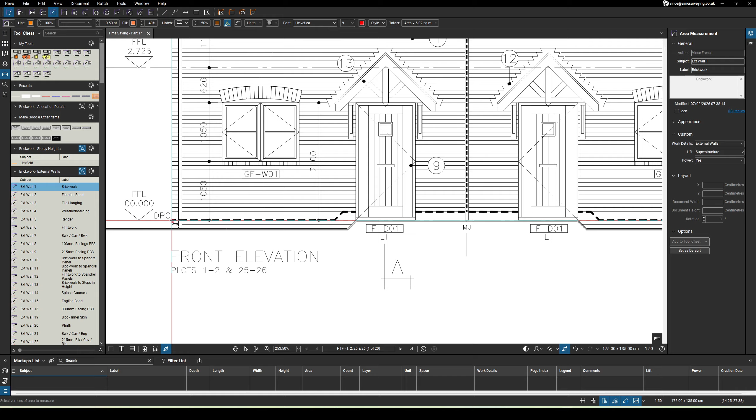I've got loads of them, and a typical way of normally doing this is I would come over here, I would grab my first wall measurement, and I would then mark up. I would try and work out this bit over here, and then I would get it to where I want it for the first floor. So that's 2.6. I don't want it, if I come over and look at the sections,

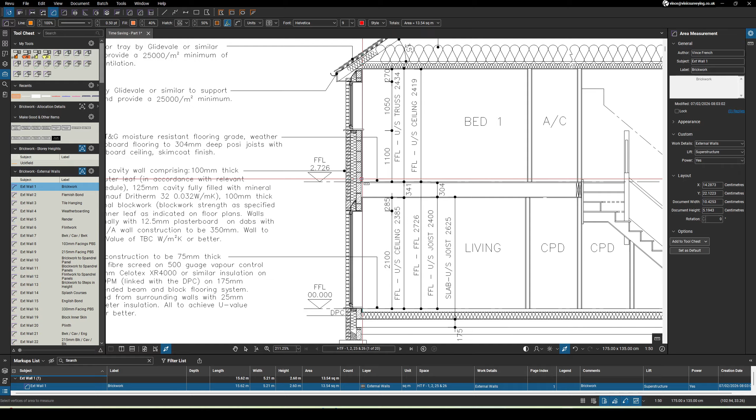I actually want it 2.4 to underside of joist, and then to get up to underside of plate I want another 2.7. You're probably saying, well, I'm allowing for 2 courses of facework here that I don't need, but the kind of allowance of that will be offset by any coursing blocks that we have to do in the internal skin. So I would just measure it up to 5.1 meters. So that's slightly wrong. So I'm going to bring this down a bit.

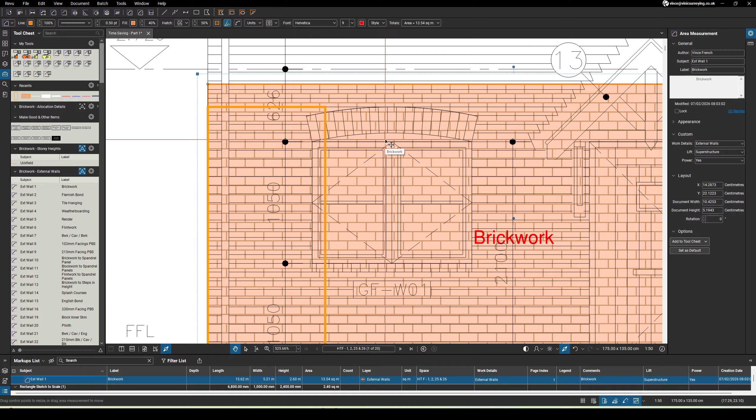So I could look at sketch to scale. Let's have a look at sketch to scale. So I could do a meter wide, and I want it 2.4 high. So if I put this over where I am, so I'm going to start again. I'm going to delete that area out. I'm going to grab this tool again. I'm going to come over to the middle over here. Here we go. So I'm now 2.4 high.

I could do the same for measuring the first floor. So for the moment, yeah, let's do that again. So if I do a meter wide by 2.7 high, gives me where I am here. Just drop this down here, and then I'll grab this over here again. So that kind of gets me to where I want to be for my outside walls.

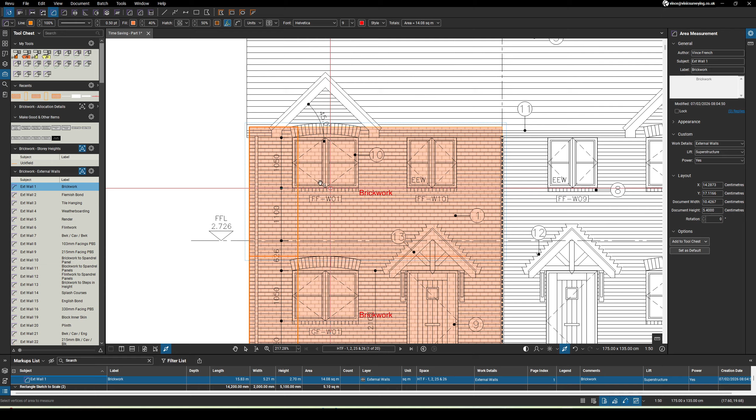It's a bit of a fiddly process, but then I'd need to also look at things like I start adding things on for DPC trays here. I might have a DPC tray at first floor joist level as well. Then I'd want to start looking at scaffolding. So I'd have a blocking lift down here, and then I'd have a scaffold lift here somewhere, one just under joist, third lift, and one just under plate. So I've measured all of that.

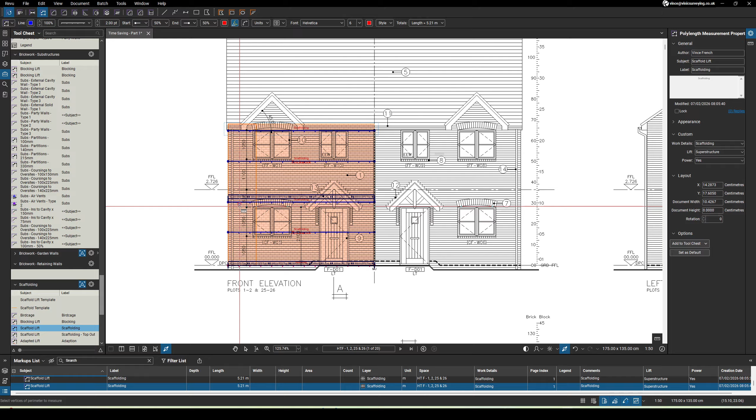Obviously I do cutouts for the windows and everything else, but I'm just using this example for the external walls and the main bits of work. So I've done that. If I wanted to, for the rear elevation, I could literally just copy all of that and drag it down and put it in place. So that's quite quick to do that measurement there. But then I need to come over here and start measuring all of this. And I was thinking there must be a different way of doing this and a different process.

And I don't know how many people looked at using the properties panel, but I thought to myself, well, we can use that. So what I've come up with, instead of doing all these separate elements, oh, by the way, what I would also do in all of these is over here I would allocate that to the ground floor and this one to the first floor, and I'd have to do all of this as well. So I thought, instead of doing all of that, why don't I do this instead?

So what I'm going to do is we can use the properties panel. So I'm going to go back up here and external wall one. So I'm just using this as an exercise.

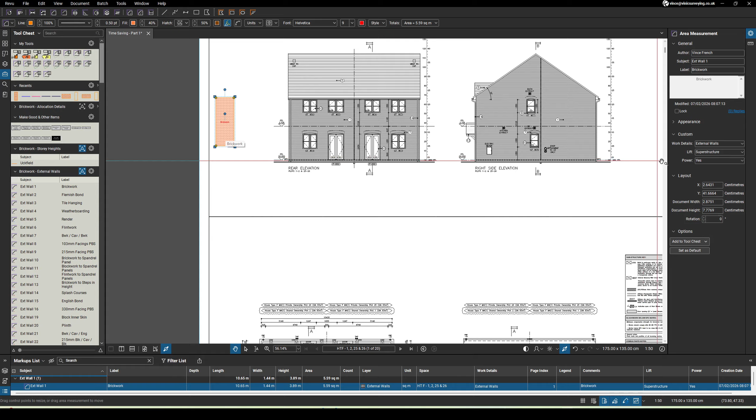I'll do this slightly differently if I was measuring elsewhere. So on a proper project I'd put it on a header page or front page. But what I'm going to do here is you can start using this. Now this is a 1 to 50. So all I need to remember is the document, the measurements in here are double.

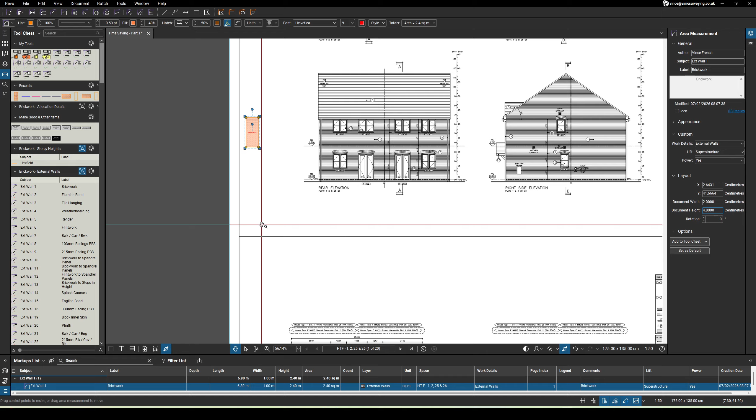So if I put document width of say 2 in here and 4.8 here, you'll see down here I'm actually 1 metre wide but 2.4 metres high. I'm going to take that, I'm going to duplicate it, I'm going to make this one 5.4, which is my 2.7 twice, so it's 2.7 high down here. That's great, I'm going to do that.

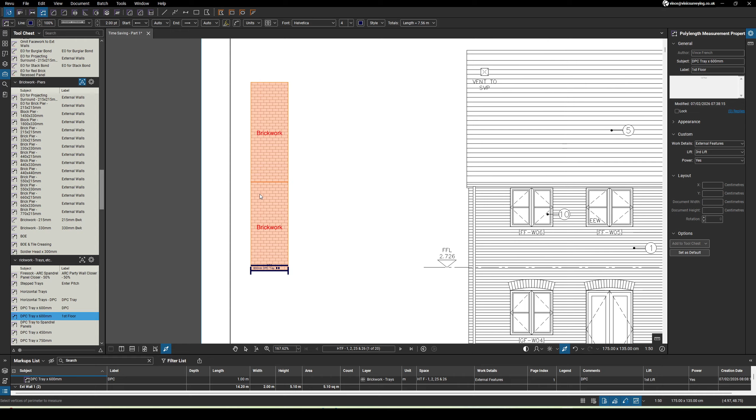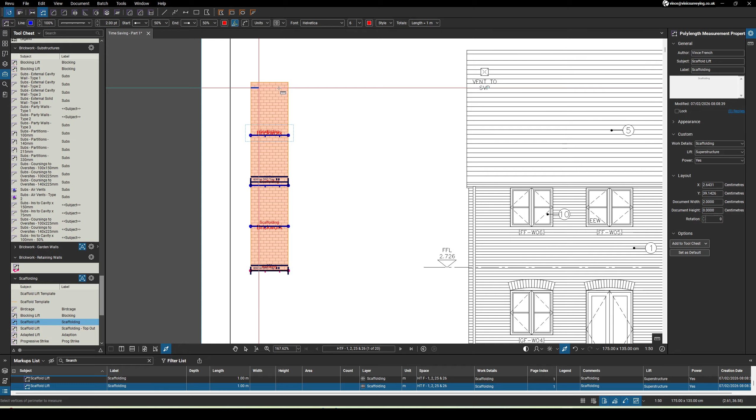I'm going to start adding information like that's the ground floor, this is the first floor. I'm also going to come down here and I'm going to put my trays on, DPC, first floor, and I'm going to add my scaffolding on. So, blocking lift, scaffolding, another lift, and another, and another. Right, so I've got a little template there, which is great.

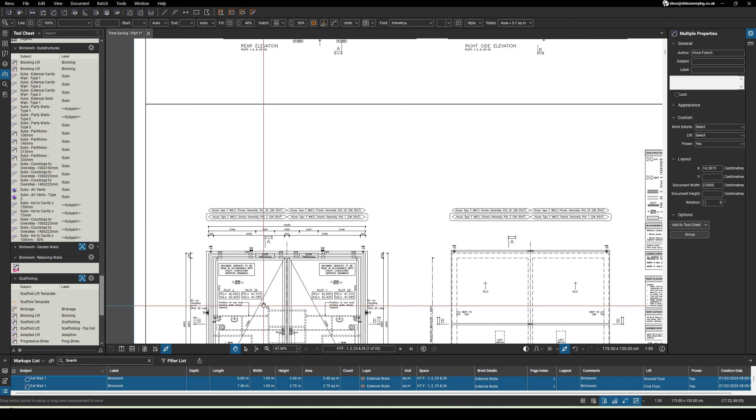So what I can do with this now is I can just grab this, copy it, come down here, come down in this bottom corner down here, paste. That looks like it's in the right place. So if I come down here to the measurements on the floor plans, I want half of the 10.43 for just one unit, but bearing in mind that I'm doubling, I can use this 10.43 measurement. So if I just come over here now and change that to 10.43, I'm measured.

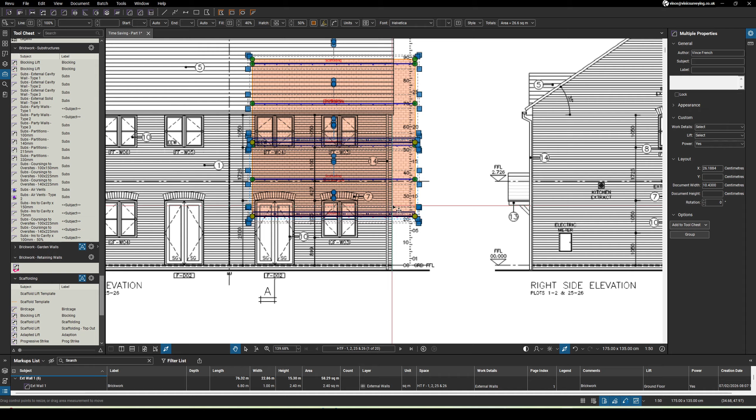I can paste again over here. I can, if I want to, select that again. I can drag that down here. There we go. And if I want to, I can come over here, paste. And what I can do is drop this over here. And what I need to look at now is I've got 9.553. 9.553 times 2, 19.106. So I just change that to 19.106.

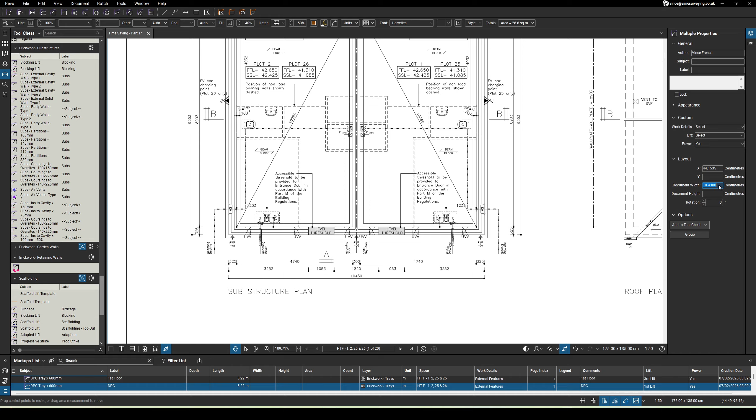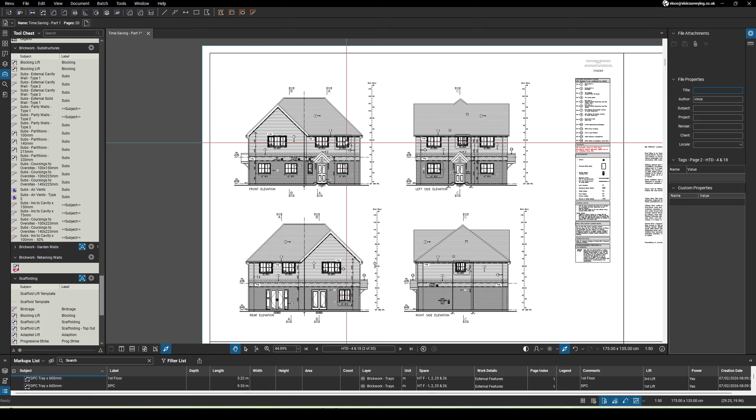There you go. So all of a sudden I've got all of these areas measured, I've got my scaffolding, it's all correct, it's brilliant. It really makes things a lot quicker and it's very neat as well because everything's in the same place.

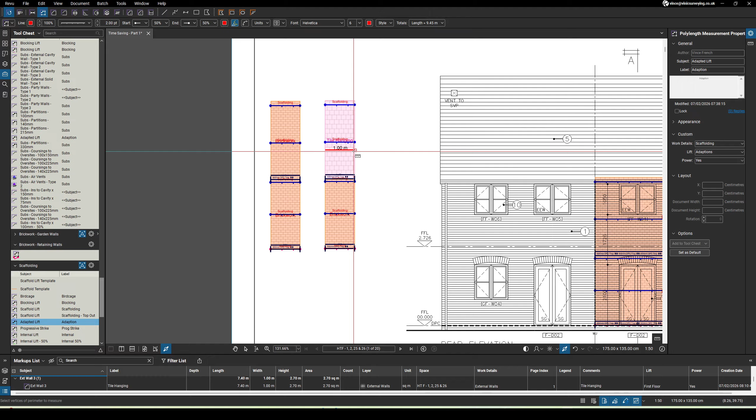Now when you come to things like these with the tiled units, what we could actually do is take this again. What we're going to do is duplicate that, but we're going to come back up and we're going to select tile hanging. I'm going to change that to tile hanging. What I'm also going to do is we're going to need adaptations on the scaffold for this. So I'm going to put an adapted lift in through there and an adapted lift through there. So now we've got one for the tiling.

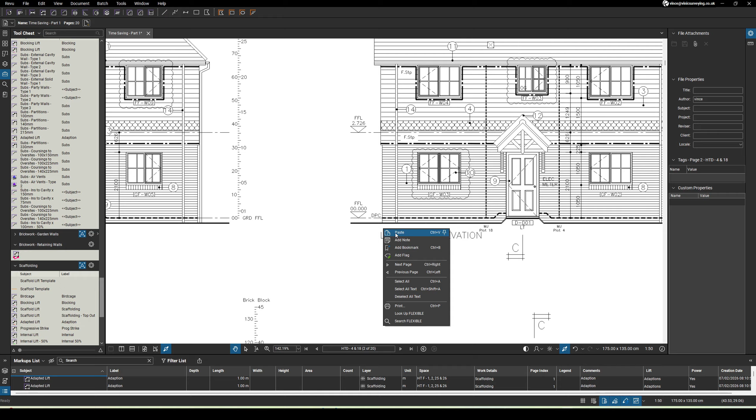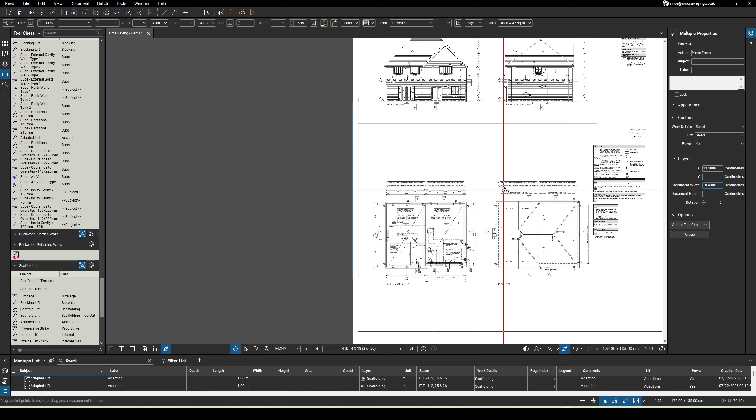So let's just grab that quickly. I can go copy, I can come over here. Well, let's just do this elevation over here. Let's just move that into place. And what are we here? We are on that side elevation there. So 9.215, 18.43. So I can just change that to 18.43. And there you go.

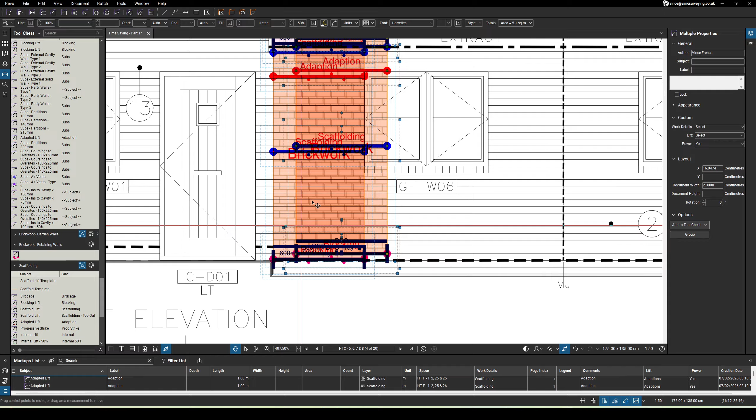And if you've got a mixture of the two, like in this unit here, what we can actually do is we can just paste in place again. We can have the first one here, come down here, drop it in place. And what's the width of this? So it's going to be like the 6.38 that we need to use. There we go, that's there.

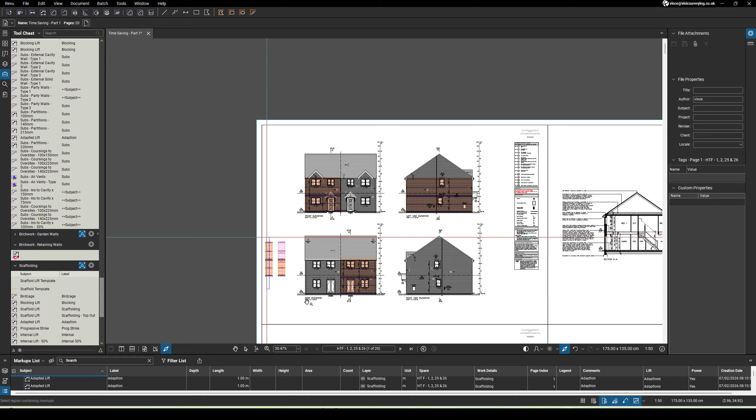And if we come back to my first example, we'll grab this, copy, paste. There we go, and what do we need for that? So that's going to be done with 2.7, 5.4. And there you go.

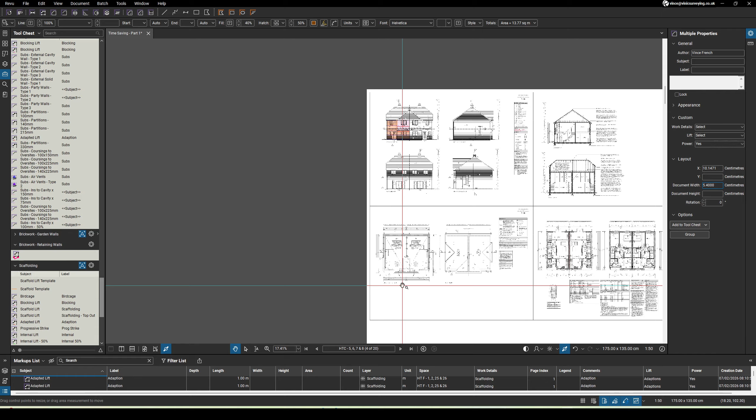It makes these measures really, really quick to do. And it's pleasing to the eye because everything's lined up and everything will always be lined up. And yeah, I just find this works really well.